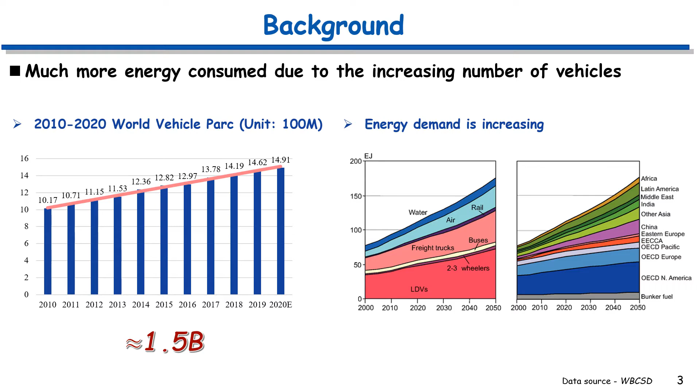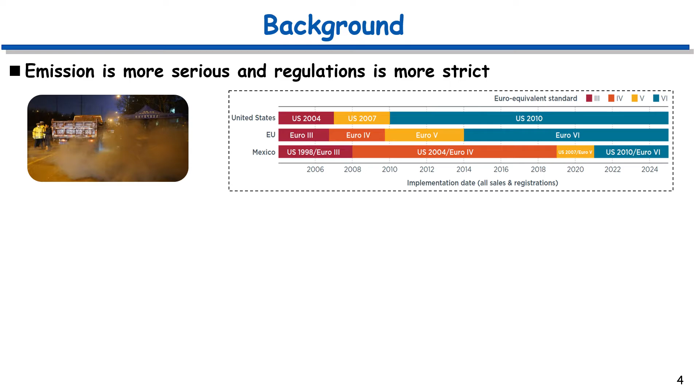In addition, the other issue is that emission is also becoming more and more serious. In order to reduce air pollution, governments all over the world have issued strict regulations, which push the OEMs to develop advanced technologies to meet such limitations. Among the emissions, it is hard to reduce NOx, which may lead to acid rain, photochemical smog, and is also harmful to human beings and the environment.

Luckily, the development of intelligent connected vehicles brings more information via connectivity, such as traffic information, infrastructure information, road information, and so on. Intuitively, the use of connectivity data can help the vehicle react to the driving environment in advance to avoid unnecessary operations that cause excessive energy consumption and emissions. Thus, the connectivity among vehicles offers us many opportunities to save energy and reduce emissions.

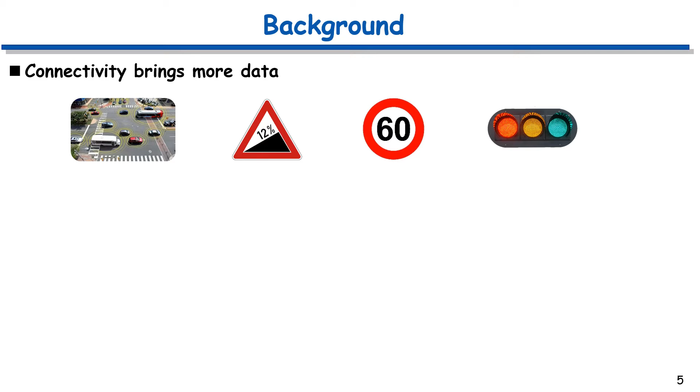Well, how to apply this huge amount of data to vehicles is another issue. Thanks to the nature of model predictive control, which has the ability to anticipate future events and can take control actions accordingly, the connectivity information can be directly implemented into state prediction. In this way, it seems MPC is the best fit for powertrain control with connectivity.

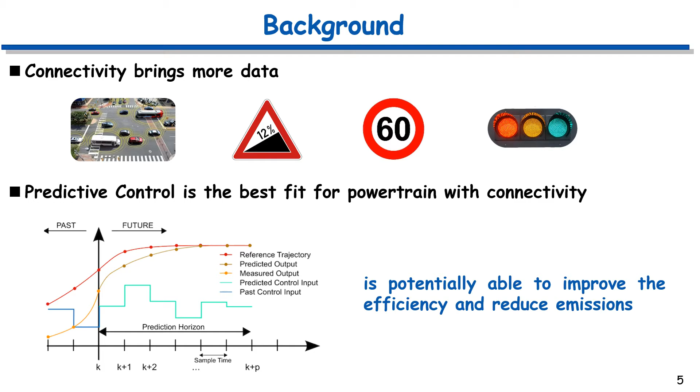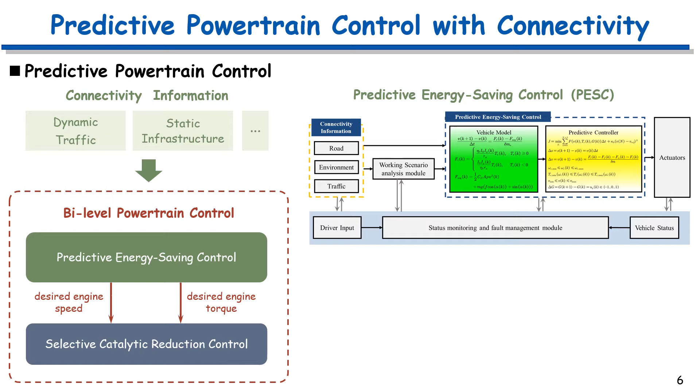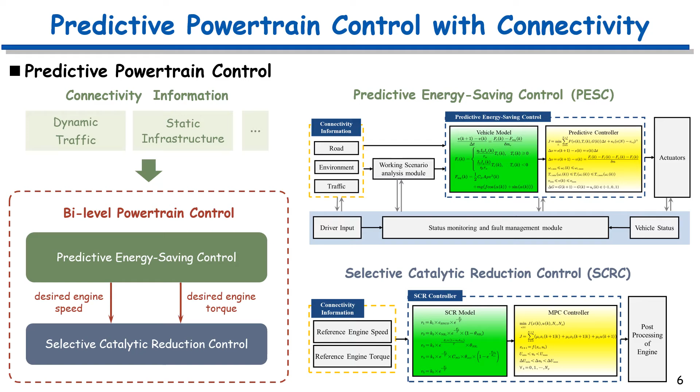The lower level is selective catalytic reduction control, that is SCRC, and it is responsible for optimizing the chemical processes within the SCR, given the references of engine speed and torque. For the whole control scheme, the upper level PESC calculates the desired engine torque and engine speed according to the connectivity, then gives the information to the lower SCRC, and the engine can adjust its working states. These two controllers are coupled together and thus realize energy saving and emission reduction simultaneously.

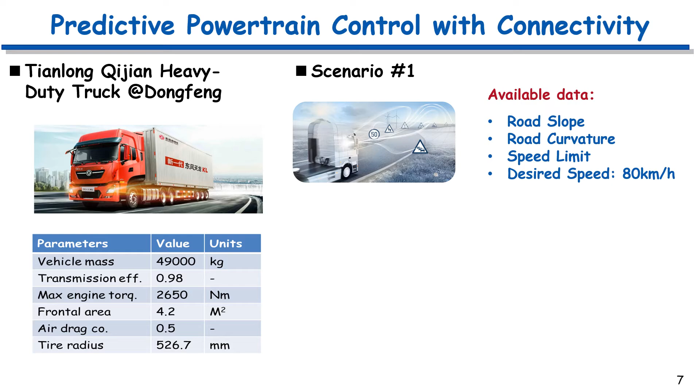To verify the performance of the proposed control scheme, the Tianlong Qijian heavy-duty truck of Dongfeng Motor is used to do the experiment. Two typical scenarios are designed to show the effect of different available connectivity on energy consumption and emissions. In the first scenario, the truck is driving on the highway alone, and the desired vehicle speed is constant, 80 kilometers per hour. In this scenario, road information is available for working state adjustment, such as road slope, road curvature, and speed limit.

The second working scenario is a vehicle following scenario with a variable desired speed. In this scenario, the working state of the truck is merely affected by the traffic information, that is, the speed of the front vehicle.

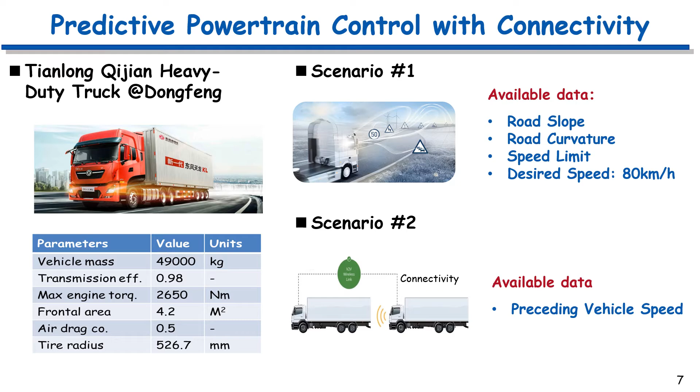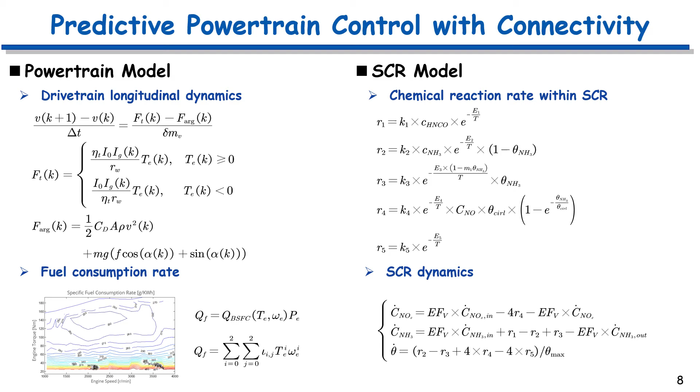The powertrain and SCR dynamics models are developed as follows. In the drivetrain dynamics model, we consider all possible driving resistances of the vehicle, such as tire rolling resistance, air resistance, and so on. Besides, we also consider engine braking of the heavy-duty trucks. As for the fuel consumption rate, we choose a two-dimensional polynomial to fit the experimental engine data. Then, on the right side, in the SCR model, we mainly consider the chemical reactions to illustrate the SCR dynamics.

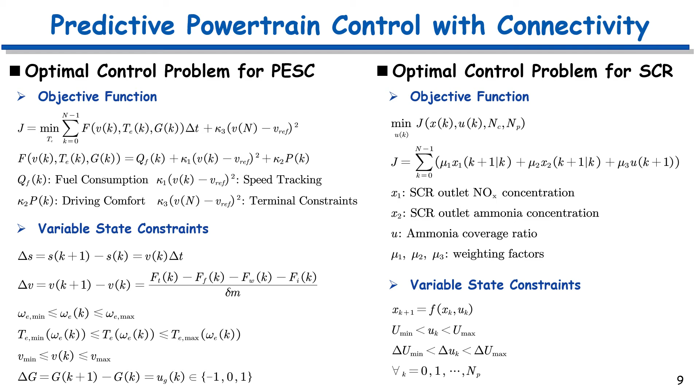After the objective functions are designed, the optimization problem is transformed into an optimal initial covariate problem by using Pontryagin's principle of minimum, that is PMP. And an optimal solution is quickly reached in a given range using the dichotomy method.

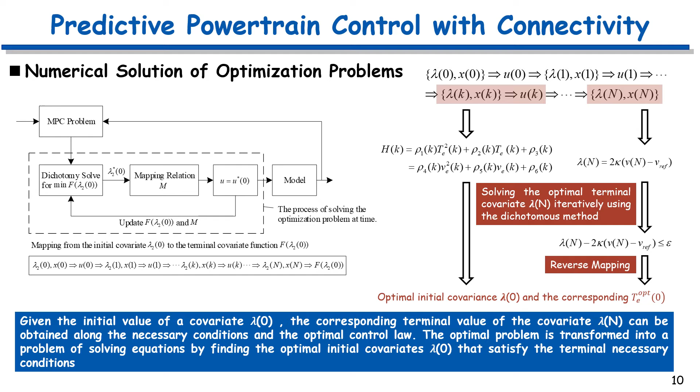In order to show the performance of the proposed controller, we consider 5 combinations of the control schemes. First, the baseline controller called BC is designed to track the desired driving speed only without using any connectivity data. The second one is a baseline controller with a typical industrial feed-forward SCR controller, again without prediction, that is fixed nitrogen to ammonia ratio. The third one, named PESC, is proposed by using the connectivity data and optimizes fuel saving and speed tracking in MPC fit.

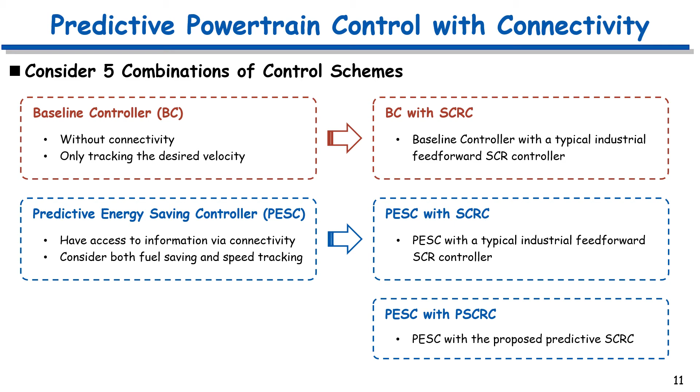The next one is PESC with a typical industrial feed-forward SCR controller mentioned above. And the last one is the PESC with a predictive SCR controller. Both of the upper level and lower level controllers use the connectivity data to optimize the working states of the vehicle and engine.

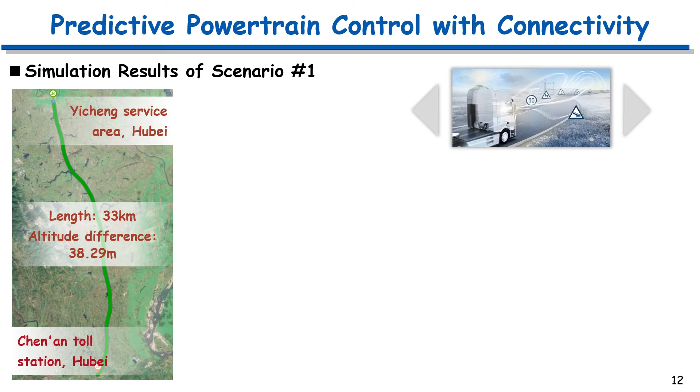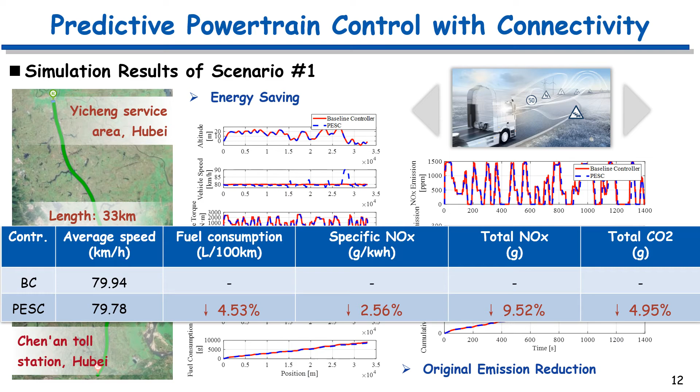This slide shows the result of the first scenario. In the first scenario, we ran the truck on a 33-kilometer road from Yicheng service area to Chen'an toll station in Hubei. And the results show that compared with BC, the proposed PESC reduces fuel consumption by 4.53%, and the total original NOx and the CO2 are also reduced by 9.52 and 4.95% respectively.

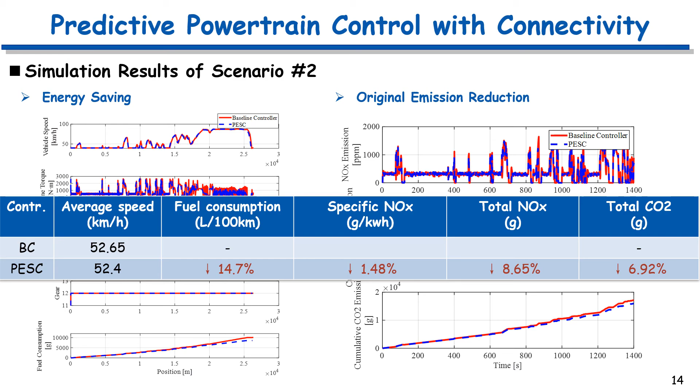Besides, the total original NOx and CO2 are reduced by 8.65% and 6.92% respectively. Here are the results of the bi-level control schemes for scenario 2. Compared with the baseline controller, the use of the front vehicle speed and the online optimization in the high-level controller reduced about 7.68% on NOx emission. In addition to this, the use of prediction and online optimization in the lower level controller further brings about

22.98% reduction. Totally, when comparing the upper level and the lower level controllers both with and without prediction in the bi-level control scheme, we have about 28.9% emission reduction.

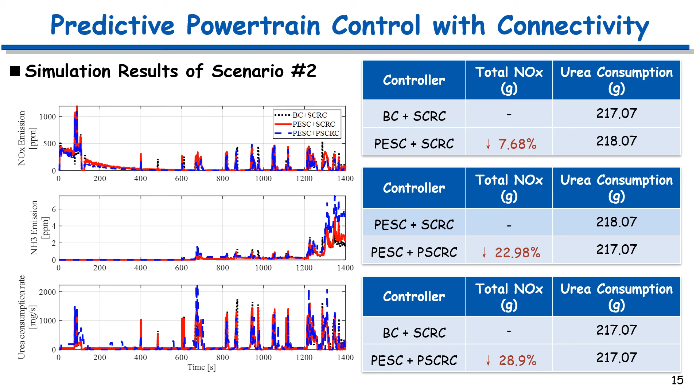Okay, finally I wrap up my presentation by summarizing the topic: what can powertrain control do with connectivity? With the development of sensing, communication, and computing technology, we are now in an era where a huge amount of data is available and computing is becoming cheaper and cheaper. At the same time, the control methods are well established, such as MPC, proven the best fit for powertrain control.

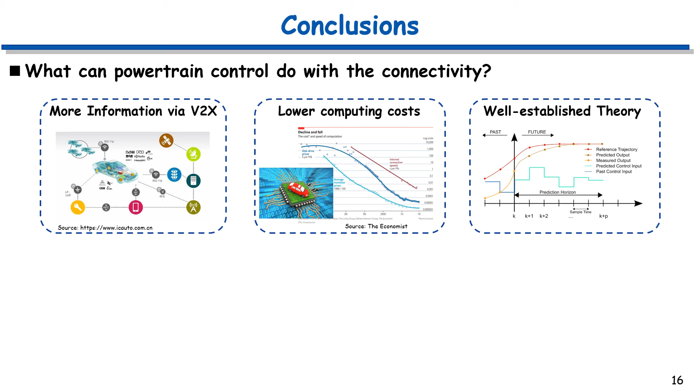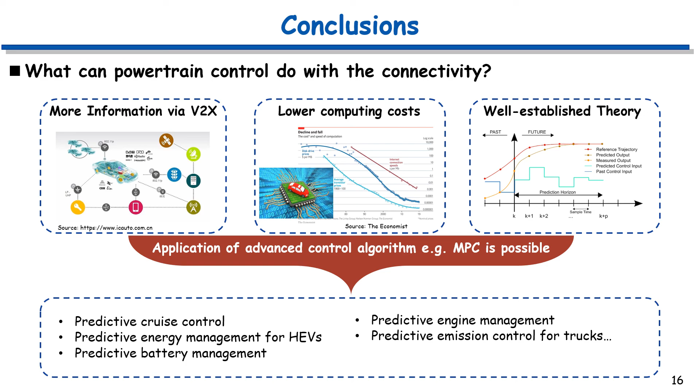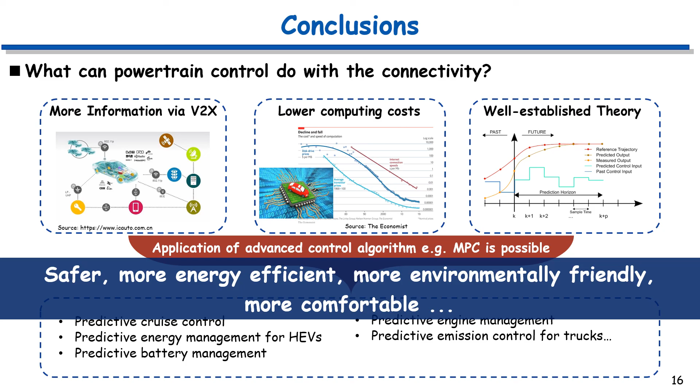All these factors facilitate the application of advanced control algorithms into vehicle operations, and consequently invent more new vehicle technologies. They include but are not limited to predictive cruise control, predictive energy management for HEVs, predictive battery management, predictive engine management, and predictive emission control for trucks, and so on. These advanced functions will enable future vehicles to be safer, more energy efficient, more environmentally friendly, more comfortable, and more convenient. This is my presentation.